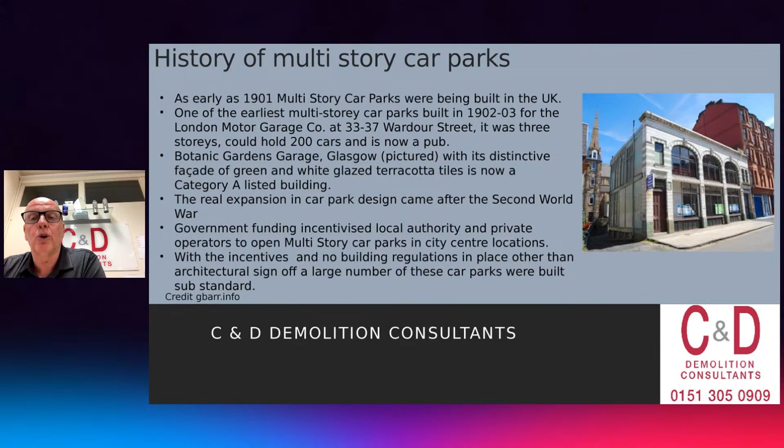Now, the problem with this is that we were relying an awful lot on gravity, and there was a lack of movement back from the 1960s. So the columns were erected, then each floor was jacked into position and fixed into place. Column heads were either inserted, or a box was welded around the column to hold the slab in place.

A number of car parks were also constructed using lightweight concrete planks, lifted into place with a dowel put in position. So when I talk about a dowel, basically a section sits on top of it and holds it in place, along with a reinforcing bar.

So we do have a situation in the UK where a lot of car parks are held together only by a dowel - no nuts, no bolts, no connections, no reinforcing welding together, no concrete overlaid. Effectively, a dowel bar is holding a car park in place.

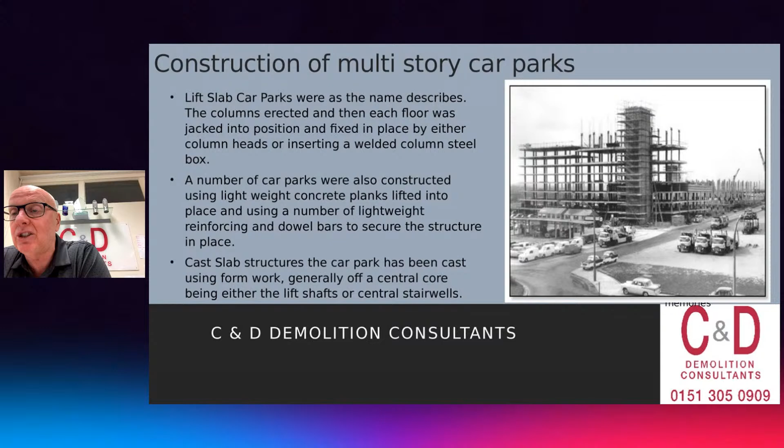And again, at the bottom, cast slab structures of car parks have been cast using formwork. So another type of car park was where we'd cast it into place, lifting from a core stairwell. We can see on the right-hand side we've got a big tower - that's our core strength. The rest would be built as an in-situ car park, with shuttering put up and concrete poured in with steelwork in it. Bear in mind, we're talking about pre-1970, where in the UK building regs came in in '72, and we also had Euro codes come in at a later stage.

Governments incentivized car parks - why was there a huge build-up of car parks? Because the government made it really economically viable to build them. There was a lack of building regulations in place when early car parks were constructed. As we work today in the UK with building control, building regulations and design, we had none of that pre-1972. There's been a number of questionable construction methods used.

We recently undertook a car park in Southend-on-Sea where we found no reinforcing in the concrete inside the structural columns. They were just cast in, with no steel reinforcing in them.

So again, additional to pre-1972 factors: poorly constructed, poorly maintained, and deterioration of concrete frame and slab. If we've got a poorly built car park, it's then poorly maintained, poorly surveyed, and we follow this with deterioration over time, because car parks are a money generator. We have a slight problem where we can then fail.

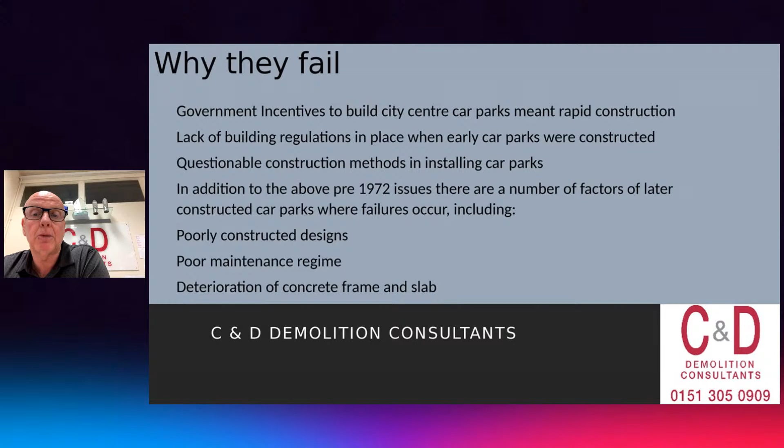A couple of environmental factors that are really playing heavy on us at the minute: changes in global weather conditions. We see warmer summers, colder winters, and accumulation of snow and ice. So where we have a real problem with car parks is snow and ice.

Mark talked a little bit before about potholes. Certainly with any failure in a car park - bearing in mind we have no windows, it's open to the elements - we get a lot of water, a lot of accumulation of snow and ice. As the car park freezes, it expands, and as it contracts, it contracts again, and we have that on a seasonal basis.

How do we get rid of the snow and ice from a car park? Well, we use salt and chemicals. Salt and chemicals start to erode the concrete, go through the concrete, and then start to erode the steel inside.

Okay, so we've got an awful lot of problems, and again these cause the failure not only of the concrete but of the steel in there. Now, what we've also found through my investigations and research into car parks is incorrect steel fabrication. We've also had the reinforcing, if it's in situ, where they welded the wrong gauge of steel together, and the weld has actually produced a failure on the steel, and it's not been fixed together.

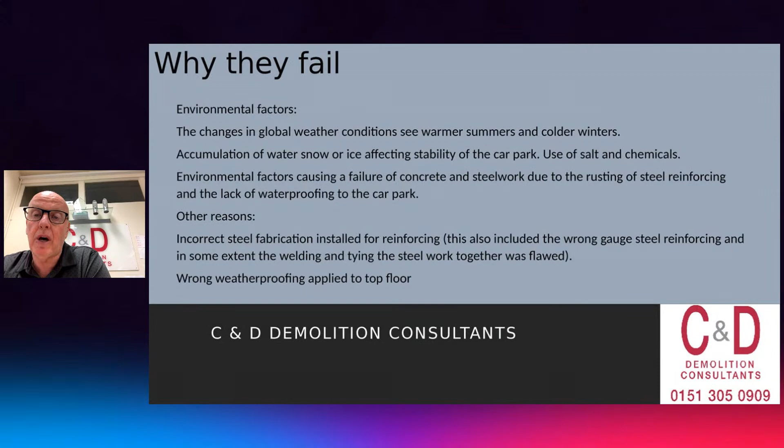Also, at a lot of the car parks we now have poor weatherproofing applied to the top floor. If the weatherproofing fails at the top floor, then we get an awful lot of water seepage all the way through. If anyone goes into a car park, you'll see that the drainage is all internal. What happens if we have a failure of the internal drainage is that water seeps all the way through the car park, especially if it's poorly maintained. Then what happens is you have water and you have failure, and then we have expansion of concrete, failure of the steel work, and then as we move forward we can have failure of the concrete.

A bit of a twist of words on this one here - I think you can see here it says welding, a good example of bad welding. So basically that's all that's holding in place either the lift slab or the planks being put in place. When we go and have a look at some of the car parks, all we can see is poor box sections around the column heads. We can see the column head on top of it, and that's the only thing that's holding that up.

What happened was, on many occasions, the weld failed because they were welding to steel inside of the concrete - almost welding steel trying to weld it to a small piece of steel inside of the column. So it tended to fail. And again, there was no checks, no building control, no third-party verification that the work was done correctly. It was done on speed, a 'let's get this up as quick as we can' approach. So we had an awful lot of failure around the column heads.

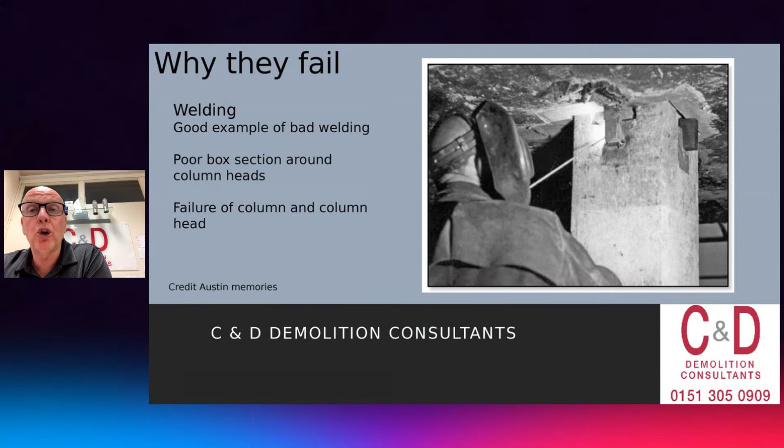Mark, next one, please.

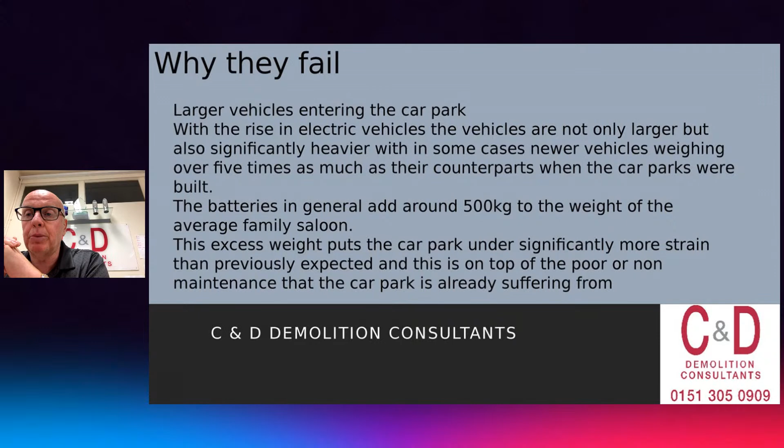As Mark rightly said at the start of the show, with some really clever questions, we've now got a rise in electric vehicles - not only large but significantly heavier in some cases. Newer vehicles weigh over 5 times as much as their counterparts the car parks were built for. When these car parks were designed in the 40s, 50s, 60s, nobody could ever have imagined we'd be going into electric cars 30, 40 years later, and we hadn't realised how heavy the batteries would be. We've now got a bigger population, a heavier population, we carry a lot more in our cars, and the cars are getting bigger - we've got SUVs, 4x4s, all significant types of SUV vehicles. So we're now starting to get close to the maximum the car parks were designed for.

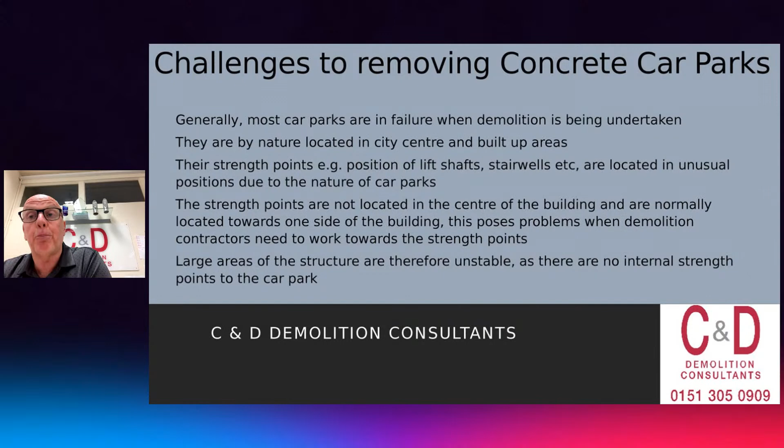Moving back on, chaps, generally most car parks are in failure when demolition has been undertaken or prior to being undertaken. They are by nature located in city centres and built-up areas, as we discussed before. We're going to talk a little bit about strength points on buildings - what do I look for as a demolition engineer for strength points? Position of the lift shaft, stairwells, how they're located due to the nature of the car park, and where we've got some strength in that building.

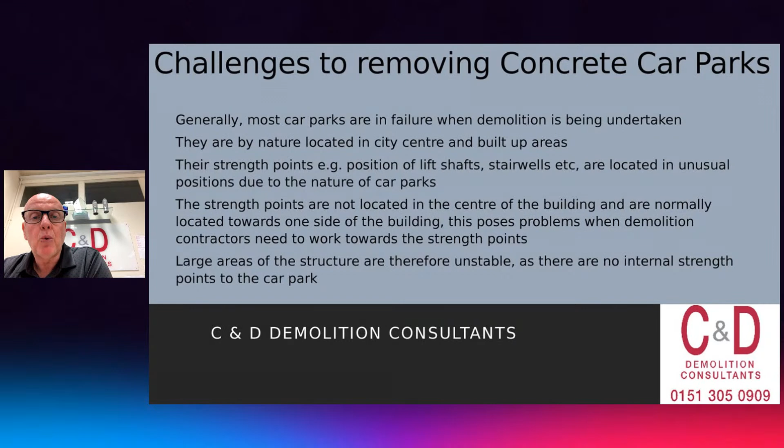Remember, strength points are not located in the centre of the building - they're normally located towards one side or to the end. One of the big failures that happened on a car park recently is that the strength points were at two ends and the middle failed. Large areas of the superstructure are therefore unstable, with no internal strength point to the car park. We'll look a little bit later on as we move the slide, Mark, please.

So how do we take down demolition in a car park that's actually failing? We look for how the loads are transferred through the floors, what backpropping is needed, how leading edges will be protected, how materials will be removed down the slab levels, and how to prevent catastrophic failure of buildings, i.e. when it's got scaffolding around it. And how would the scaffolding affect the demolition? We've had a number of scaffolding collapses on demolition buildings over the last couple of years, so we'll talk a little bit about that. And again, how would you demolish the building using the strength points?

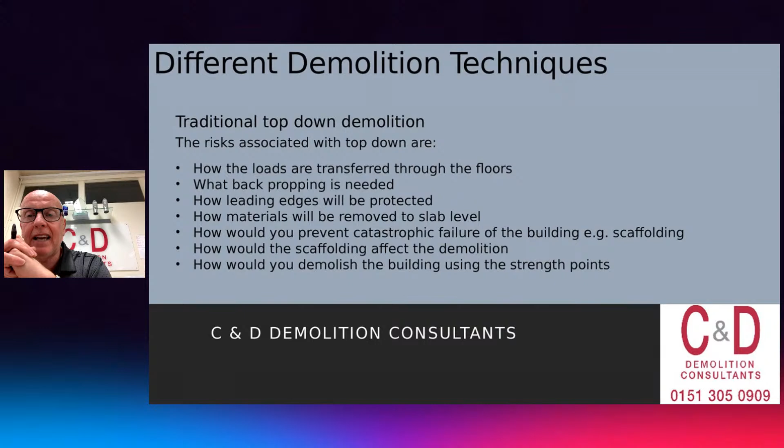Okay, so typical demolition there, a top-down structure. Why is it called top-down? Well, we're going to start from the top and demolish on a floor-by-floor basis in a controlled manner with the scaffolding around the outside. Now, what we've got to bear in mind is the scaffolding is purely there for access and for protection of dust and materials coming out. It is not a temporary work strength from in there. We're just using that purely to enclose it and to ensure any labour goes onto the outside, protecting it from there.

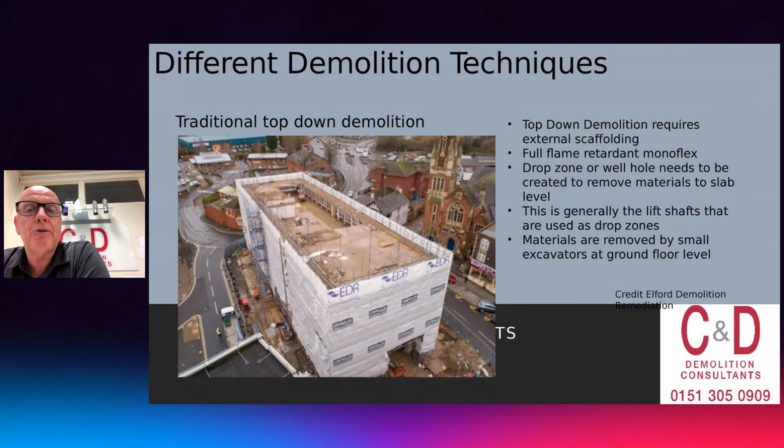So then, fully sheeted off with flame retardant monoflex. We've got a drop zone, where we'd normally use the lift shafts where possible. If not, we'd create our own. And the materials would be removed on a floor-by-floor basis.

This is a surprising one. This is a fairly new car park that we had to demolish - within 10 years it had started to fail, and we had to put a backpropping system in place to keep the car park up, so obviously no cars could go in there. So what do we need to do in terms of demolishing a building? Well, due to the nature of the car park, we may have to backprop it, and in some cases we use sacrificial propping where we just keep the props in and hope we can recover them, or if not, they'll just be sacrificial. They'll have to get broken and damaged, and we just leave it as is so we can take it down from there.

One of the great points before, I think it was from Tim, to say, do we need structural advice? Yes, we need to make sure we get proper structural advice when we demolish a car park. Car parks may become unstable during demolition because we are removing strength areas or strength points. So therefore we move towards, as we develop our building demolition techniques, our lift shafts, stairwells, any shear walls, or any preferred strength points that we have. And we can also make our own strength points by backpropping or putting an engineered solution in place.

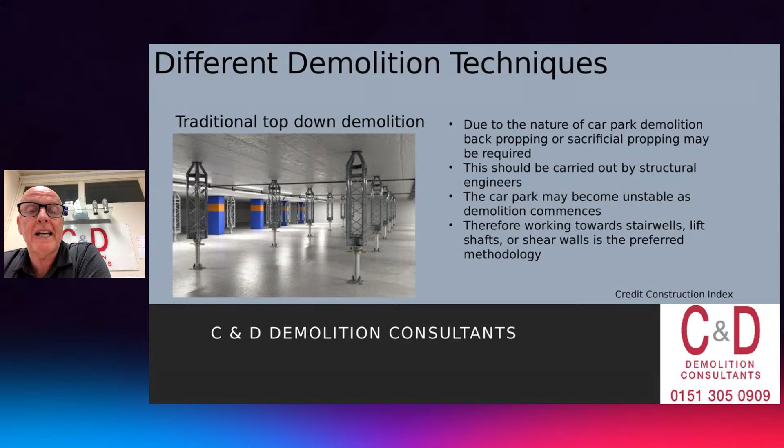Certainly in the UK, I don't know what it's like over there in Luxembourg, but in the UK we've got the National Federation of Demolition Contractors who've put in place guidance for floor-by-floor or top-down demolition, so we've got some specific advice. We've also got BS 6187/2011, the code of practice for demolition, which has a large section on this. We've also got the EDA, and over in America you've got the American Association with their go-to practice for doing different types of top-down demolition. But certainly it's a perceived technique where we go on a floor-by-floor basis.

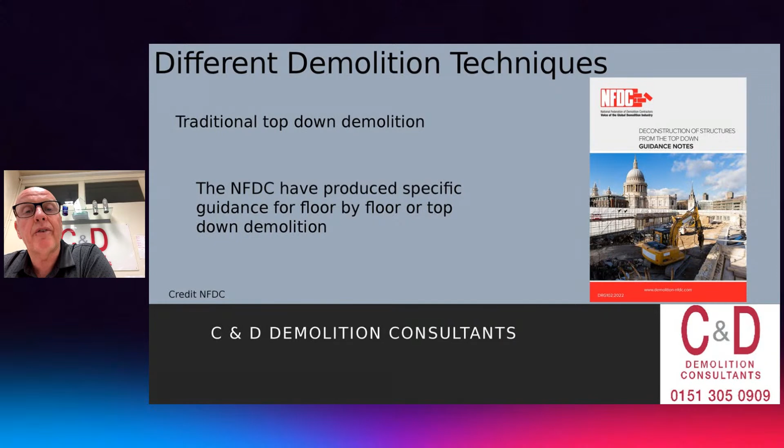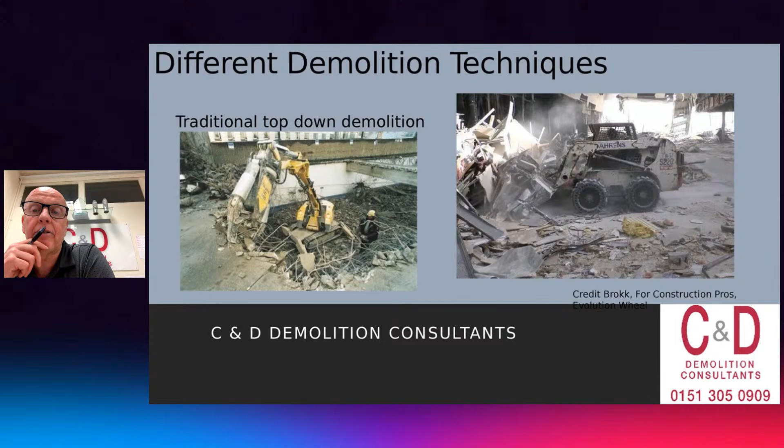Also, what we can do here, we can see on the left-hand side we're using Brokks, and the reason we use Brokks is that they tend to be a lot more lightweight, with less point loading and less heavier than a traditional machine. On the right hand side, we're just using a bobcat to push material, soft strip material, down the lift shaft from there.

Okay, different type of technique. I know we're quite short of time, but this was a job that I was called into by a local authority and a demolition contractor who we know quite well, Mark Bryan from JBV.

Warrington Borough Council called us in because the car park was failing. They'd had to emergency close the car park because it failed. A bit like Tim's point before, asking if it was independent - well, they actually got a structural engineer to come and have a look at it. He deemed it was starting to fail, rang us up, and then we came in and said, yes, we believe it's failing.

Now, on this one, as opposed to putting scaffolding around the outside and doing a traditional top-down approach, my suggestion was not to do that. My suggestion was to close the roads around it for a weekend, get a JBV, get a number of machines, and take it down over the weekend, hitting it quite hard to ensure safety. The reason we did that was because we thought the building was going into failure - even going back to the strength points, we decided the building potentially failed. If we'd put scaffolding around the outside to do it from there, that would have been risky.

So what we decided to do was create an exclusion zone. We do a lot of explosive demolition, so we're quite used to exclusion zones. Basically what we did was create, in place of an exclusion zone, 1.5 times the full radius of the car park, and we closed the roads for a weekend. Yes, a number of people weren't happy, but we did it in a 48-hour period.

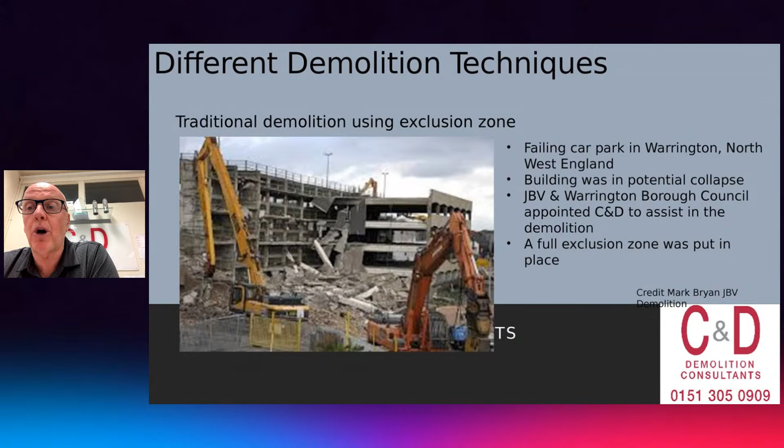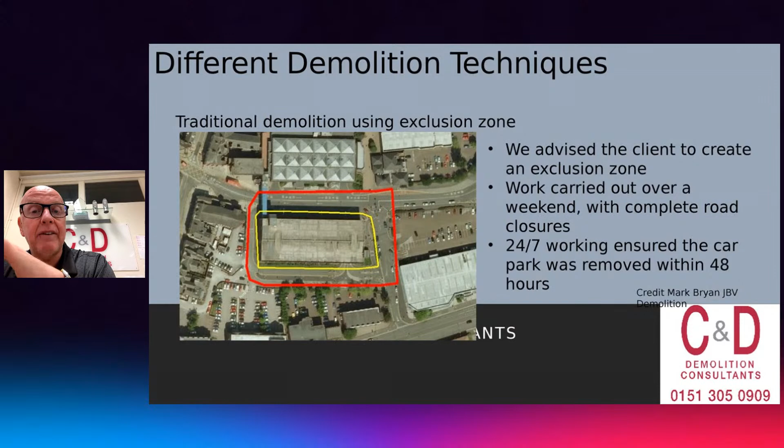So, Mark, if you could move to the next slide. We looked at the alternatives of the car park here, marked in yellow. We decided there was a potential that this would fail - we were quite confident that if the building had stayed open much longer, it would have come down. So what we did is create an exclusion zone, marked in red. We closed the whole area off, and over the weekend we brought in a large amount of plant machinery just to get it down safely on the ground.

Great thing about this - we've created the exclusion zone. If a catastrophic failure occurs, it's only going to fall back into its own footprint. What type of machines were we using? Well, we used large, high-reach machines in there with an exclusion zone, knowing that if failure did occur, it wouldn't go towards the machine. So again, we de-risked the program from in there. We told the council it would be a weekend for it, they closed the roads, and in reality it didn't really generally affect the area.

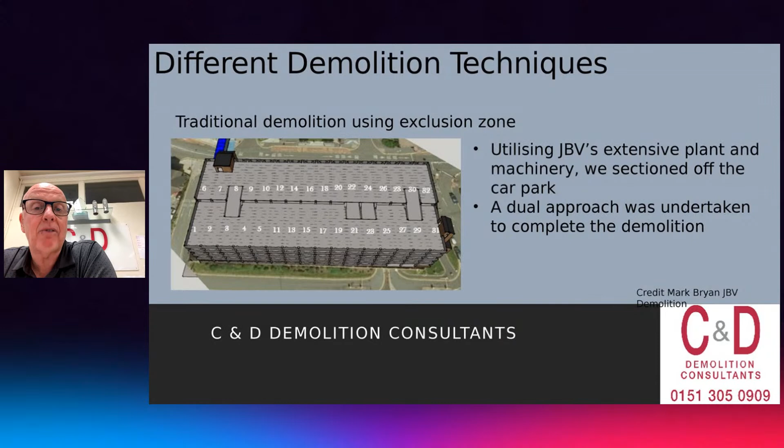Mark, if you could go on. And again, we can see here, it's actually me down there at the bottom. So we started to monitor it from there. There's our sequences - we can see our 1, 2, 3, 4, 5, we can look at the left-hand side, we can see our strength point. And we can actually see the building start to fail as we go through it, but we'll try and keep our strength points in place from there. With the exclusion zone, all the materials successfully remained within its footprint.

One of the things I have to say here, Mark, going slightly off topic, is that if a council is strong enough with building control, they'll listen to us and we'll close the road down. Why do we close the road?

Because if it fails, the only thing that happens is we have to clear it up. What happens if we put scaffolding around the outside of that building? Well, we have an awful lot of men working at height, and the 2005 Working at Height Regs says clearly avoid. The scaffolding won't give us any structural support if that building fails. It would just collapse and make more of a mess. So do away with men working at height, do away with scaffolding. Just have the right authority, take a grip, and close the roads. Ensure that the building fails from in there.

That's an interesting point you make there, Mike. I know when we had a spate of scaffold collapses over about 12 months, maybe 2 years ago, there was concern that local authorities would prefer not to do that. They'd rather keep the roads open, particularly when it's serving a shopping centre. They're resistant to closing roads, when in actual fact the easiest and safest way is to close the road, push the whole thing down on itself, reopen the road, and the demolition can take place very, very safely.

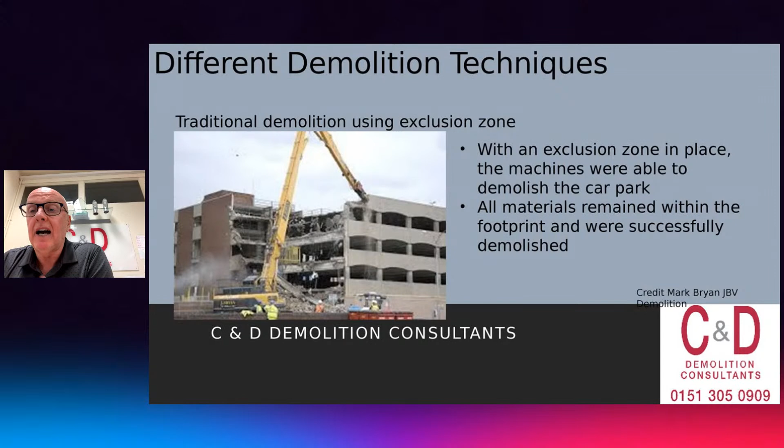Okay, so we can see there we've created an exclusion zone. We've started to knock the car park down. Mark, if you can move on to the next slide.

Again, there's us working overnight. Road closures, sealed off them in there. Yes, it was close to the town centre, but we managed to get a traffic management system in place. We gave 10 weeks notice to all the people around there. They had plenty of notice, and we moved it around.

Next one, Mark, if you could. And that's pretty much the scene late on Sunday afternoon. We'd actually finished a lot earlier. We'd actually got it down nice and safe. I think that's around about 2 o'clock in the afternoon on the Sunday. We then closed the site off. We brought it back in.

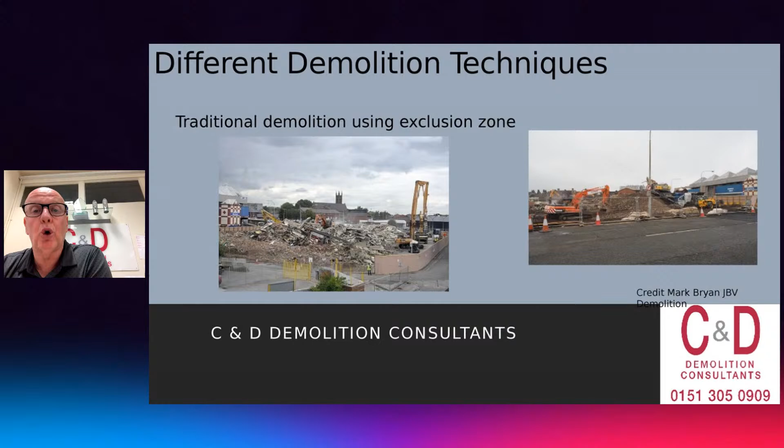We opened the roads and we got the shopping centre. We actually got some traffic and footfall back into the shopping centre early on the Sunday. So it can be done. It can be done quicker, easier, and actually less headache to the local residents, shop owners, or to the council if you do it that way. So my philosophy now is to always, where we can, produce an exclusion zone.

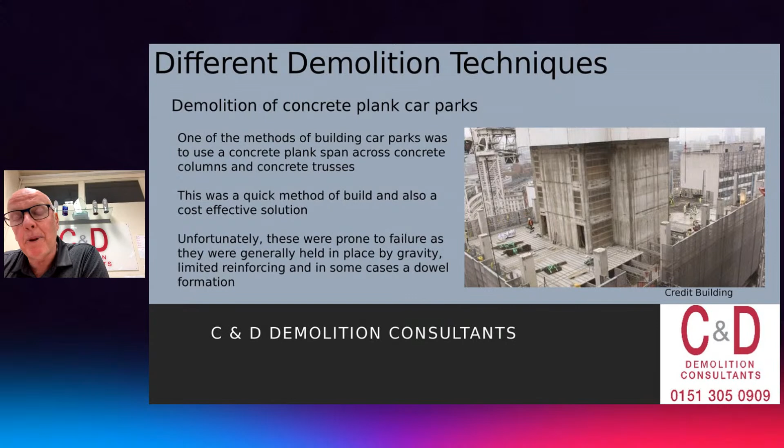This is just an indicative photograph of modern techniques where they're putting planks against the core. So what we try and do on the old ones is to remove the planks, and obviously there's a core in there. And what we tend to find, if the core or the plank has not been built properly, is that it's prone to failure.

Sorry, Mark, if you could move on to the next one. So this is one of the car parks that I was called in to, in a city centre. This is Hammersmith in London. So we can see here that we've got where the three sign is. We've got a column, and we've got two large truss planks sitting across there.

Sitting on the concrete, now what's happening there is that's only sitting on by about an inch, and is actually supposed to be doweled in. So there should be a dowel in there, but actually there wasn't a dowel. There was only one very, very small piece of reinforcing bar holding the whole place up. And you can start to see the planks failing. When we got there, the vast majority of the car park was starting to fail.

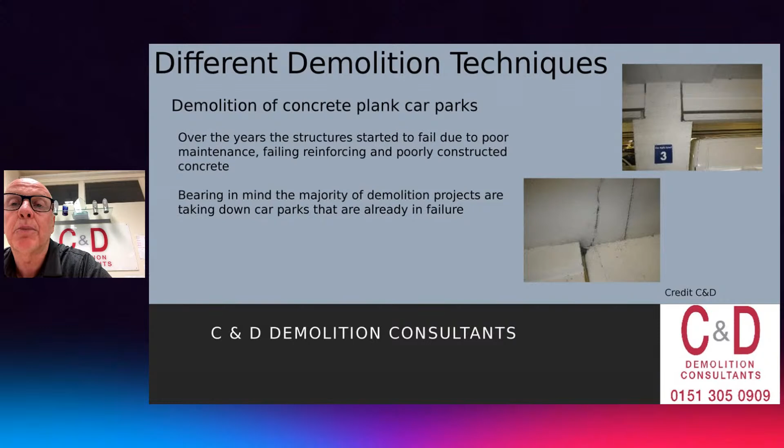Mark, if you can move on. Okay, the car park was live previously to understate on this one. And then as it started to come down on the demolition, the whole car park failed. No reinforcing in there. So what we are renowned for now for car parks is we actually have got evidential comparisons to show that car parks under demolition can fail. Not for the fault of the demolition contractor, but the fact of poorly constructed standards in there.

So when I go to the local authority or to the people owning the building and say, look, please, sir, can I have a road closure? We can now point back to factual events where car parks have failed under demolition because the strength points have failed or there's no reinforcing in the building.

To keep that in place, we would have to put huge amounts of backpropping. We would have to do an engineered solution, and we're now getting to the point where we're putting large amounts of people and engineering work into a car park, or a building, that we know is failing. So therefore, we've got support and evidence to say we need the road closure, we need to bring it down slightly different from in there.

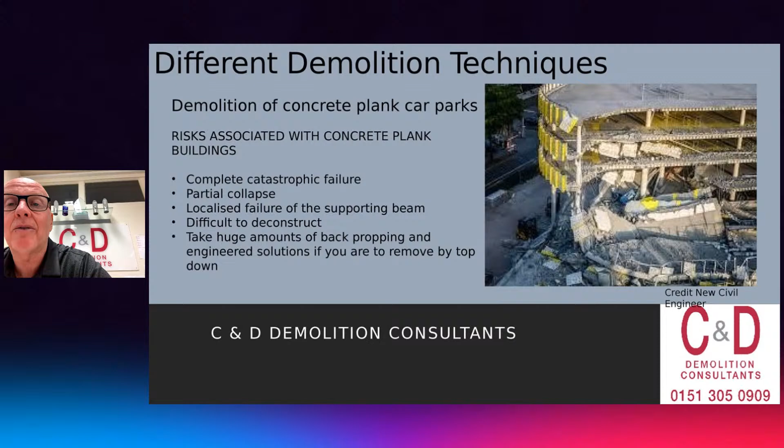Okay, Mark, if you can. Again, going back to that car park in Hammersmith, we actually touched that top plank, and basically a whole section of that building car park failed. We had the high reach out the way, but we actually started next to the stairwell, which was a strength point. So again, good practice, get good structural advice. We had a good structural engineer. His exact words were, when you touch this, I expect a large section of it to fail, which it did.

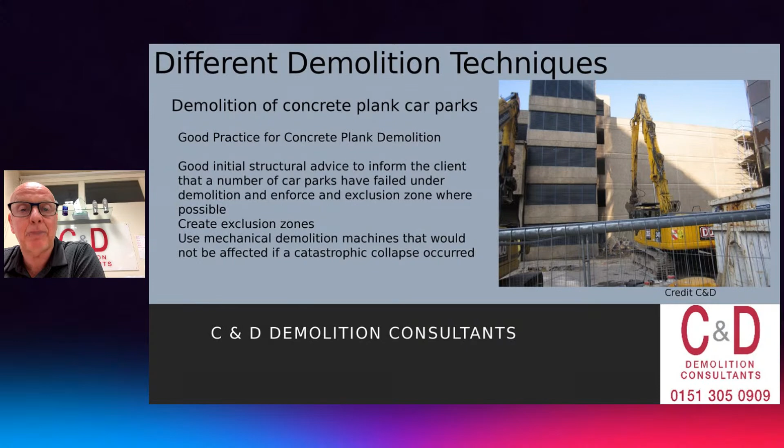Create exclusion zones, use mechanical machinery where possible. If it does fail, it will only fall down in its own situ or footprint. Let's take away the risk to our operative safety. Let's make sure that everyone is safe when they go to work. Mark, if you could go to the next one.

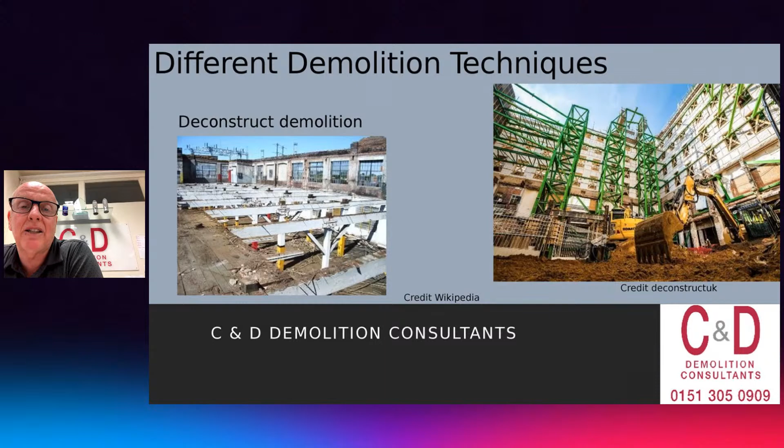What we've also used a lot for car parks is explosive demolition to demolish them. Again, very very quick. The only downside of doing demolition of car parks is that when they do go and fail, they tend to collapse very quickly.

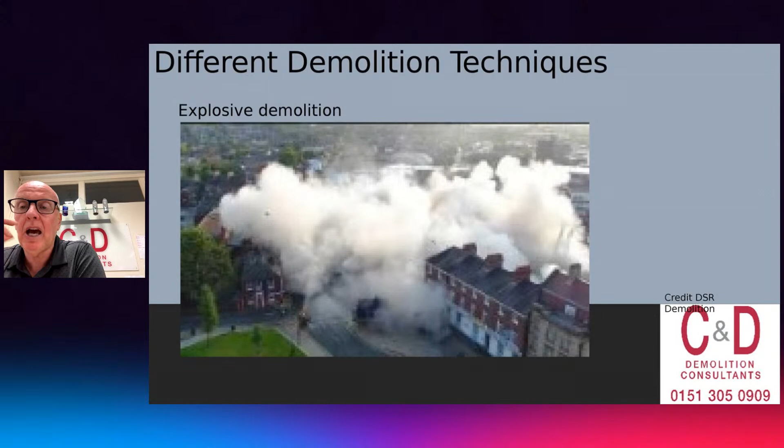So we have to be careful when we do any pre-weakening and get good structural advice. I don't know if that will play, Mark. By the looks of it, not playing, it might not show, but maybe we can show that another time. If you can move on then, Mark.

So what do we do with explosive demolition? It's a very quick way to demolish a car park. Significant time is required for planning, and when I talk about planning here, I'm talking about structural planning as well. If you have to do a test blast, which is really difficult on a car park, because if we have to take a section out, we have to really go back and reinforce the building up. And I'm loath to do test blasts now on a car park because we know it's starting to fail.

So what we do in certain areas is try to replicate or understand what's inside of it. One of the techniques we do now is Ferroscan, so we'll scan the car park itself to see what materials are in there. Is there any reinforcing? Have you got 1%, 2%, 3% of the column reinforced? And we can also do some localized pull tests to understand what we've got.

Certainly we need to get local authorities involved, statutory authorities involved as needed as well - HSE, the explosive unit - to ensure we understand what we're doing for demolition. But what we do with explosive demolition is create a large exclusion zone and effectively bring it down.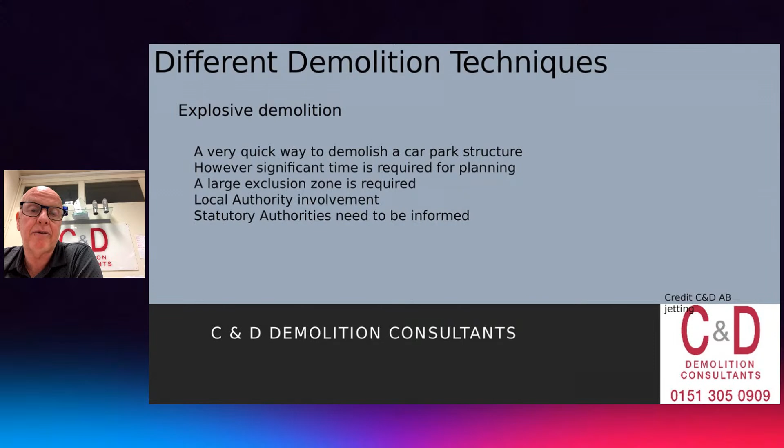One of the big problems we have with explosive demolition is we need a really good understanding of the load paths. We talked about a test column and the difficulties of doing a test blast on a column. We've also put wire ropes together around the outside, and we implode the middle, then we bring the car park in on itself. The wire ropes will pull the outside structures, and we pull it in from inside.

We've got an awful lot of many thousands of tons coming down, so we bear in mind that we're in the town centre, so we've got live services that we need to protect. We've also possibly had the evacuation of local tenants. We have to put geotex protection around it, so anything that flies off, we can protect against. Air overpressure - what happens there is if you've got a cardboard box and press it down, the air will push out, exactly the same in the car park. We get a lot of fly pressure going from there. And we also make sure that the HSE are informed on site during the demolition.

So again, explosive demolition is certainly a really good technique, but local authorities are really reluctant to use it in their town centres. Why? Because every single space in the town centre is built on, and a lot of buildings are joined together, hence why we have a problem with explosive demolition.

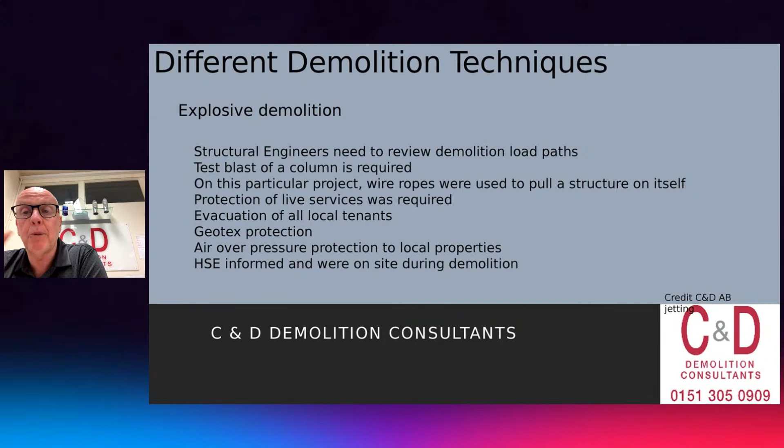Okay, the advantage of demolition though, it takes about 8 seconds from pressing the button to being on the ground. The building is made safe immediately. The problem we have is we've got to drill a lot of holes for the explosives.

So are we going to pre-weaken the building? There's been a lot of talk in the demolition industry over the last few years about whether we should pre-weaken buildings. That's what we need to make sure, because sometimes they can be prone to catastrophic failure.

We're going to have to put a lot of sacrificial props in. It becomes expensive, time consuming, and we also have to put additional protection things like straw bales, shipping containers may be needed to protect other ones from there.

I'm over in Dublin at the minute, and we've just been called in recently. We've got a 40 metre high building, and we've got a car park associated with it. One of the areas that we need to protect is the local area.

So what we're doing is we're putting some straw bales, some shipping containers, 1, 2, 3 on top of each other. What we've also done in the past with explosive demolition is pulled the wires in the legs around the containers. So as the building comes down, the wires will pull the containers in, so it will contain the blast. A number of techniques that we've used in the past.

Explosive demolition looks great, a lot of planning, very nerve-wracking to make sure we get it right. If it goes wrong, it can cause a lot of problems. But generally, get the load paths right, good structural engineering, and explosive demolition in car parks is a really good way to do it.

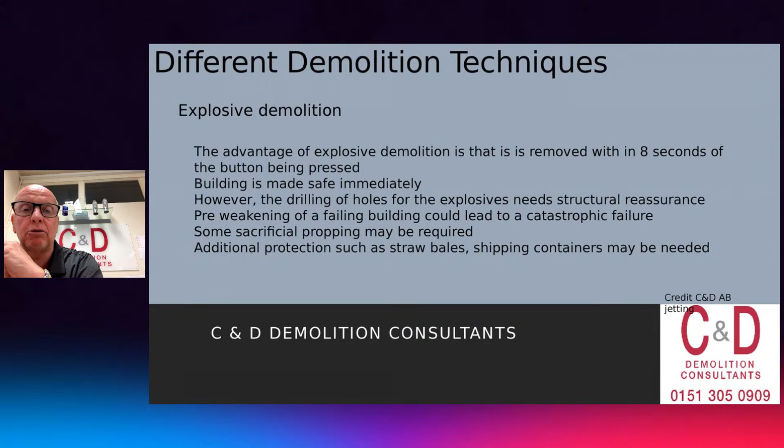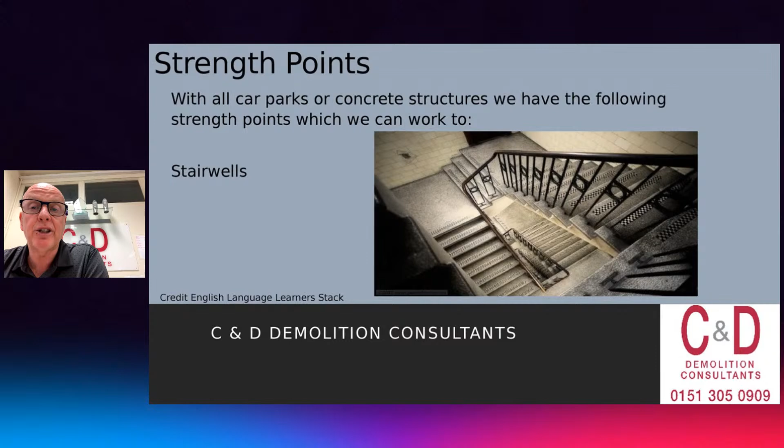So I hope I haven't bored you so far with my strength points, but when, as a demolition engineer, I go into a building, I always look for strength points. Stairwells, great strength point.

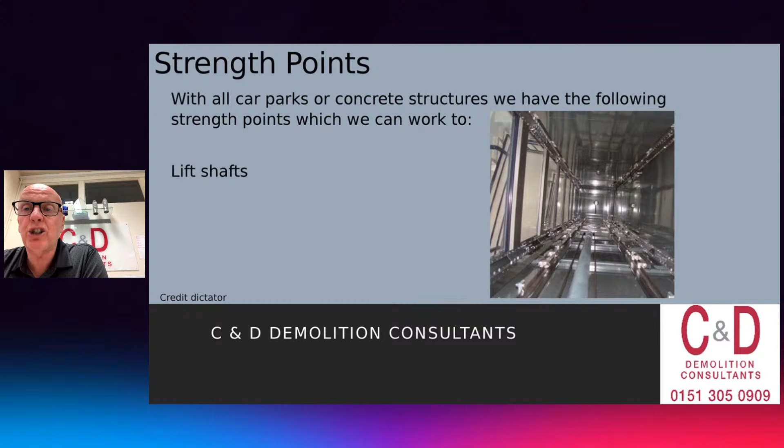Lift shafts. Why? Because they're generally concrete framed. Shear wall, very, very strong. So again, holding the lift shaft, it needs to be designed and robust.

Shear walls. We can see a foundation. On the right hand side picture, we've got a really strong RC shear wall. Again, somewhere where we can go back. It's designed to be in strength. It's designed to hold the building up.

So when I look at how to create a demolition, I always look to where's our stairwell, where's our lift shaft, have we got a shear wall? How's that related? Have we got a larger foundation that's holding the shear wall up in place? Can I work my strength back to these points? Can the rest of the building come down safely while the strength points stay in place? That's what I look for.

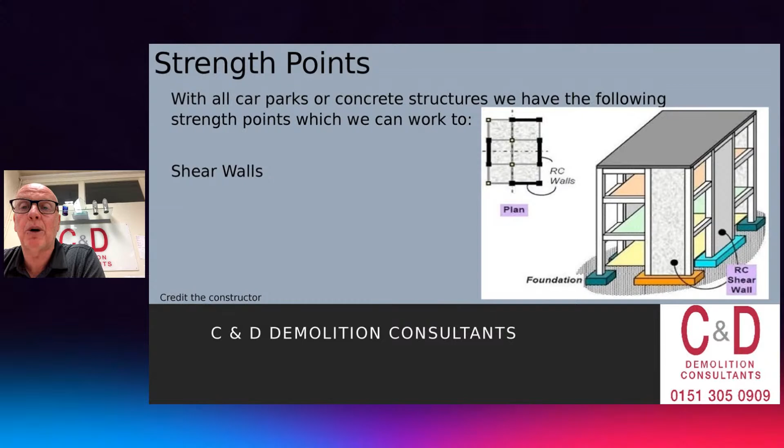And again, a lot of car parks are now joining to other buildings. So what is next to the building? Do we need some external supported structural walls? If we take a building down, how's it going to affect the building next door? So how's the strength points of the building I'm going to take down going to affect the car park?

So these are the things we need to look for when we do our pre-planning techniques.

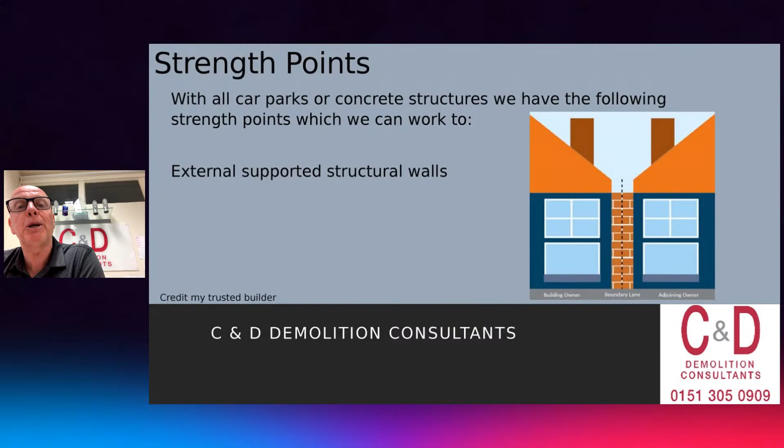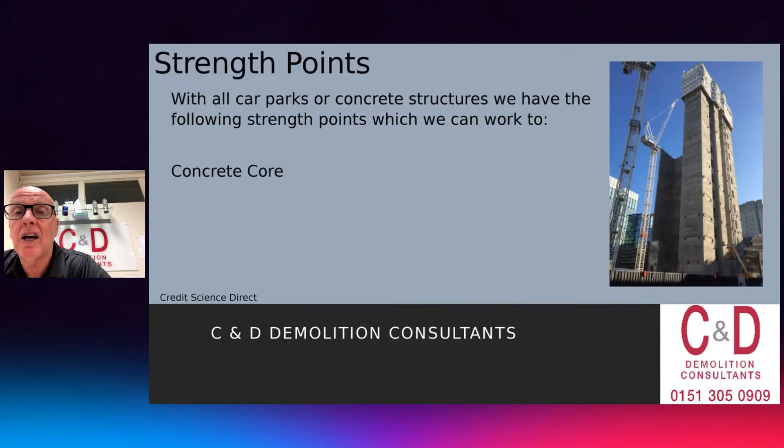Unfortunately, we don't get these strength points of a big concrete core inside car parks, or it's very rare. What we tend to do on the new modern ones is have them built in steel, and there seem to be strong points of design from there. But they will go back to a lift shaft or a stairwell. On a really, really strong building, on a new build, we've got the strength points located in the concrete core.

Good practice for demolition. Pre-demolition advice required for all demolition: seek suitably qualified structural engineers. There's some great demolition consultancy companies out there, not just ourselves. There's some great demolition structural engineering practices that deal predominantly in demolition. Really good, but pick your structural engineer correctly.

Ask them, have they had any advice? Have they done any types of demolition before with structural car parks? Have they carried out temporary works? Some great structural engineers are there for doing permanent works, but not always great for doing temporary works. We as demolition engineers look at temporary works because we're looking to hold something up just long enough for it to fail.

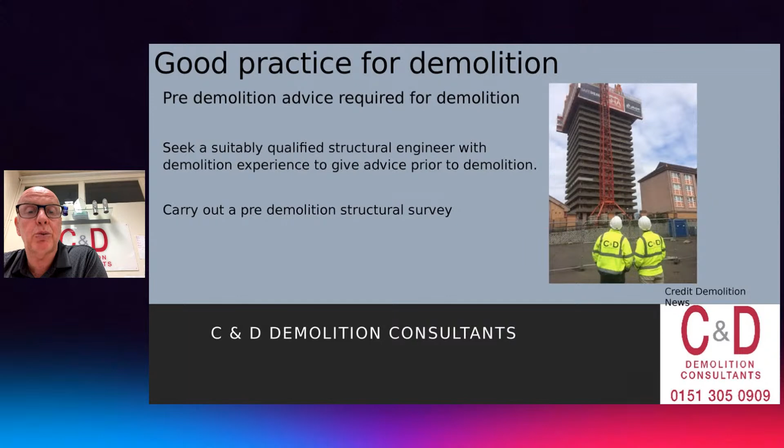I think we need to use that word 'fail' a lot in demolition, because we're looking for the building to design to fail, in a controlled manner. That's what we're looking for it to do.

Pre-demolition advice: carry out structural tests and floor loadings. Look to find out how the structure was reinforced. Do we need to ferrous scan it? Do we need to do some core testing? Do we need to do some drills? Do we need to do some pressure tests?

Is the reinforcing failing badly? Is there any punching shear failure, i.e. column head on top, is the column punching through? Are we looking for the failure?

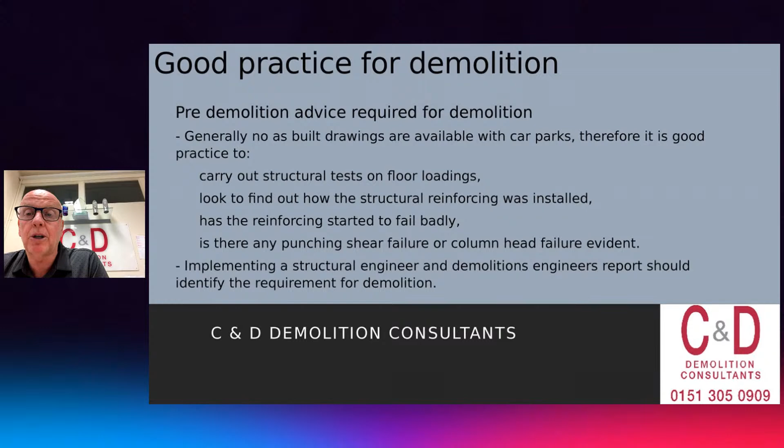Implementing structural engineering. For any of our car parks, do we have independent engineers for car parking structures? Probably not. But are we going to get good independent structural advice for taking down a car park? Absolutely. We need good demolition structural advice before we start to demolish the car park.

What questions need to be asked when we're doing demolition of a car park? Is the car park in imminent failure? If demolition commences, would a catastrophic failure happen like we had in Southend in 2011, where we found there was no reinforcing in there? Would a full exclusion zone surrounding the structure be required? Yes, it may be. That would be our preferred methodology.

Good practices for demolition. Let's look at the structure. Believe it or not, that is a car park leg on the right-hand side. That is now in failure, starting to spall. The car park was actually open when that was initially first found. On the left-hand side we see the start of water failure, water ingress, and then little icicles hanging down underneath the column. We can start to see cracks failing in the concrete.

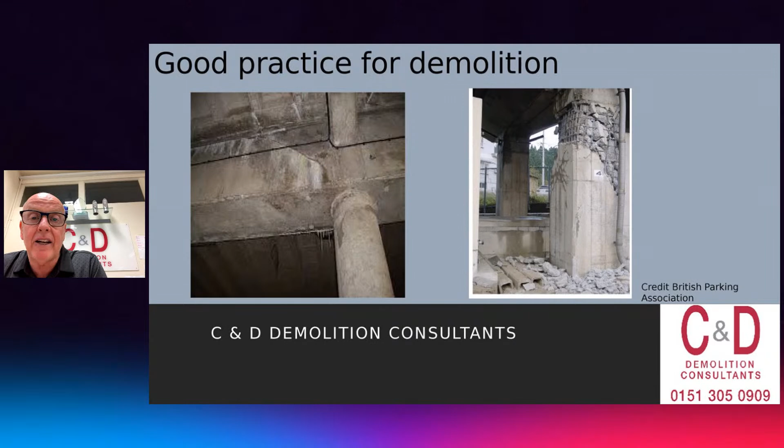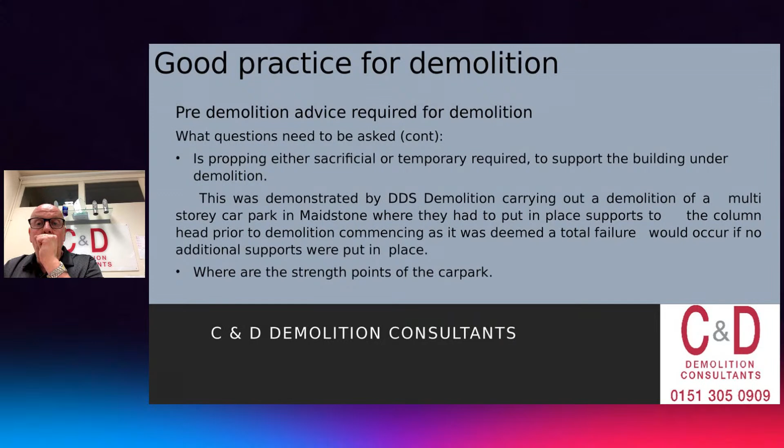Again, good practice when we look into it. Does the car park need to be propped immediately? As we see on the next slide.

We see here a car park being undertaken by DDS. DDS and their engineers realised that as soon as they started demolition, the building would fail. So they created column heads on top of the columns to support the slab underneath. A significant piece of engineering, a lot of work to be done prior to demolition, but they avoided the catastrophic failure of the building.

The engineer quite rightly said we need to create some sacrificial column heads to make sure it doesn't fail, and that's what they've done. So good demolition advice there, and we credit DDS for doing good pre-demolition structural advice.

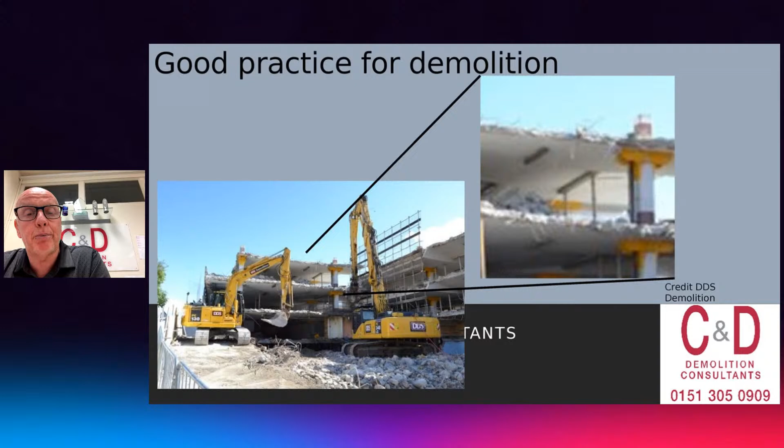This is another car park getting prepped for demolition. They're putting some props and some shore jacks in there to prevent the floors moving, and to make the box slightly more rigid when it comes to demolition.

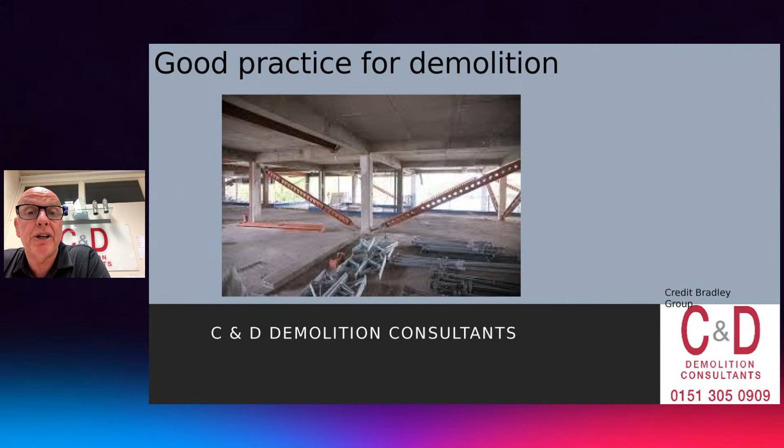So what do we look for? Again, what questions need to be asked? Ascertain any strength loss in the concrete. We can do that by core tests. We can take a core sample and pressure test it to see what strength is in there. We can also ascertain it by doing x-rays.

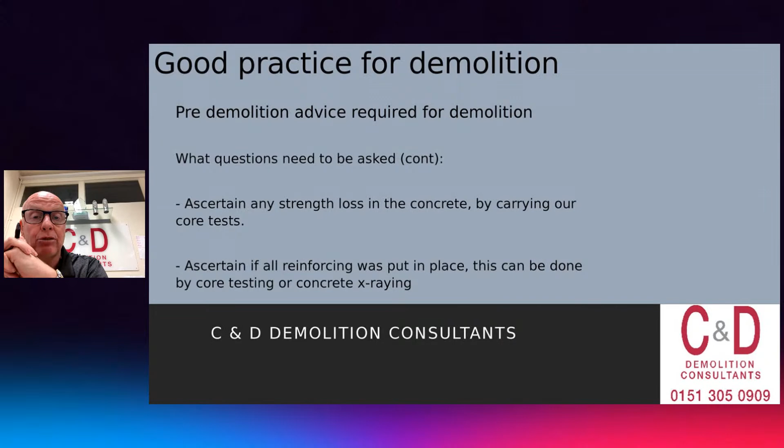Simple core test, simple ferrous scanning. What do we think a core test will cost? Probably about £100 to take a core sample. What about drilling a core sample? Maybe another £100. So for a few hundred pounds we can see what our floor says. We look for a square metre of the floor to be tested. Again, not a huge amount of money to ferrous scan a floor.

How often do we see these tests being done? We see very, very little of this testing done. So one of the questions was, how can we test the floors beforehand to ensure we're in good order? We can do some core samples, we can do some testing, we can ferrous scan to see what is available. Very simple tests, and not an awful lot of money to do it.

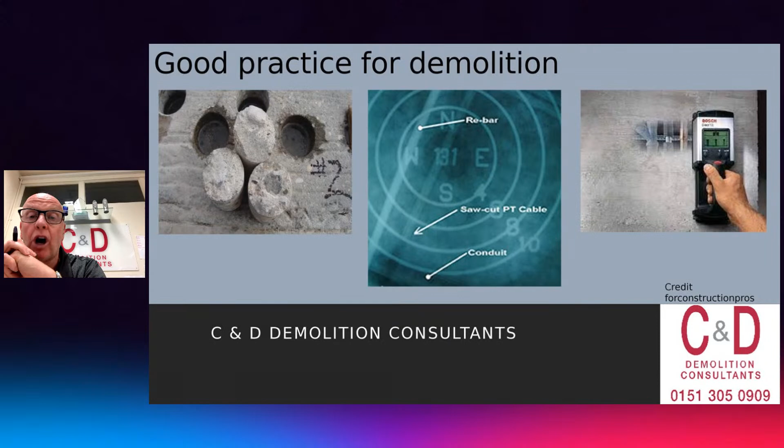Good practice for demolition: we know demolition and car parks are affected by weather conditions. One of the questions was, do we get good structural advice and maintenance? Well, the answer to that is, we know we don't.

Car parks were put under tremendous stress with heavy loads, and now we're loading them with heavier cars. We've got more climatic changes now - snow, ice, and hotter summers. In the UK last year we had a really hot summer, and we're expecting another one. Suddenly we're into a number of different areas and changes from there.

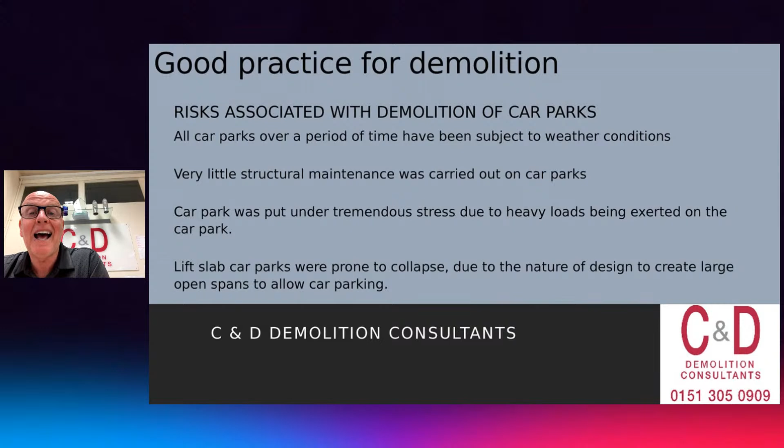We know lift slab car parks are prone to collapse due to the nature of the design and the open spans allowing for car parking. If you could move on, Mark.

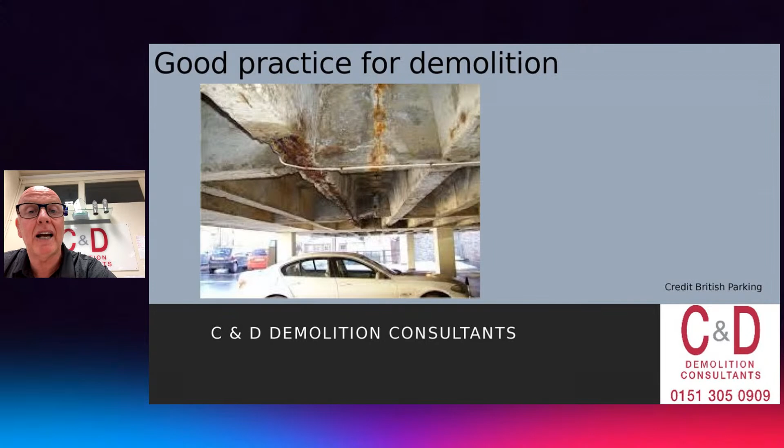And when we go into car parks now and we look, we will see that going forward. Okay, I don't think this is going to play, Mark, so I think we need to move on to the next one. Sorry. Okay, so that's us.

We think we're a bit of experts in the art of specialist engineering, and I think we're nearly at the end of our presentation. Hopefully it's been informative, and if there's any questions I can certainly answer some. I had one here from Gary Muirhead again.

Judging by the sound of some of these car parks, it will not take much to bring them down. One of the things that occurred to me is, what will it take for local authorities or the government to act? Do we require a collapse, possibly people to be injured? But then we've already had that, haven't we? So I have to choose my words carefully here.

One of the recent collapses - and the video shows the car park collapsing, let's not name it, but I think most people can see it on YouTube - about two minutes before the collapse, a young mum and her child in a pram walked past. A car went past a couple of seconds before it came down. We dread to think what would happen if that had happened five minutes earlier or five minutes later.

Now I think everyone's going along blasé, thinking this is okay. But what's going to happen now, Mark? I'm not going to say how well you and my former colleague John Woodman said about Turkey, but did you not have a conversation eight years ago about buildings under potential earthquakes?